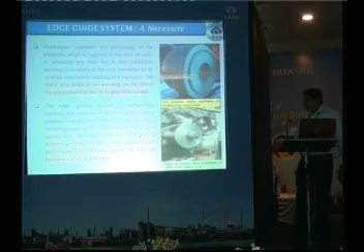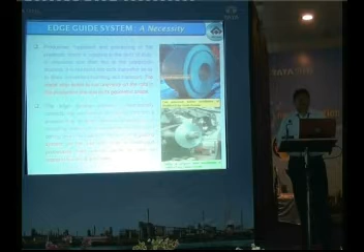If this is the side finish, then your coils will not get damaged. As I mentioned, for production, treatment, and processing of flat products supplied in the form of coils, it is unwound and then rewound for further processing.

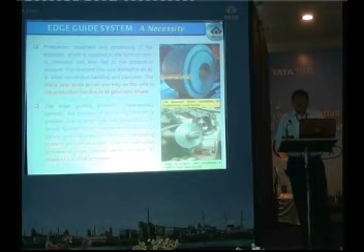For any recoiler to have a proper edge guide system, the main parameters are that the edge guide system should sense and take corrective action or respond quickly. Otherwise, if the response time is more, then your purpose will not be solved.

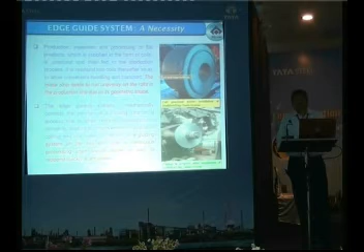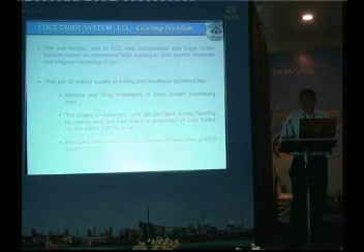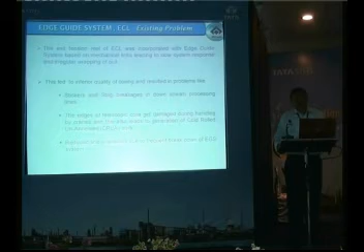Because if there is a lot of telescopicity in the coil, or if your edge guide system is not functioning properly, then you have chances of stickers and strip breakage while you process it in the downstream. Like in this case, if it is being processed through the batch annealing hood or in DCR, then you may face problems of stickers and strip breakages.

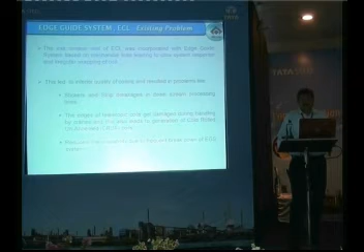The edges of telescopic coils also get damaged while handling by cranes, as I've told you. And since the system was old, there were a lot of breakdowns in the hydraulic tank, the hydraulic power pack, and in the sensors. The sensors were also old.

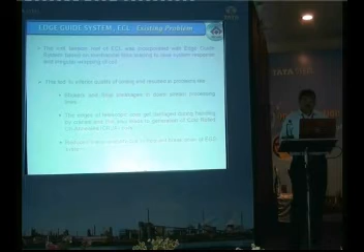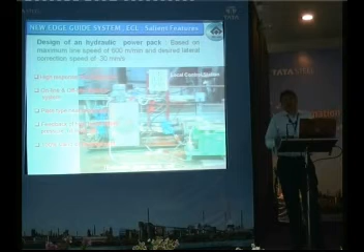So to circumvent these problems - the main problems were, one, the system was old, it was not able to sense properly or act fast. Second, the original hydraulic power pack had valves which were not of the latest model, they were quite old.

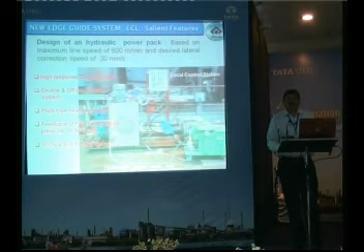Like you have servo valves right now, which are much faster and used for closed loop control. They have high dynamic response, and you can control the pressure, flow and position accurately with the servo valves that are available in the market right now.

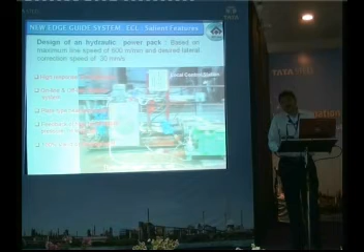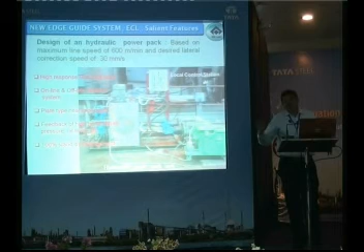So designing a new hydraulic power pack was a challenge for us. Then you had to design a system through which the operator could operate through a remote desk, because of the less manpower. Initially when the mill was installed, there were a lot of people in the shift who could run the power pack separately, who could run the system separately.

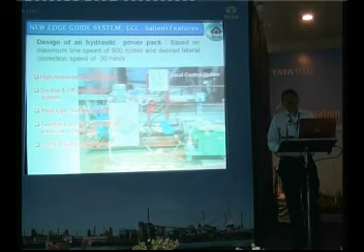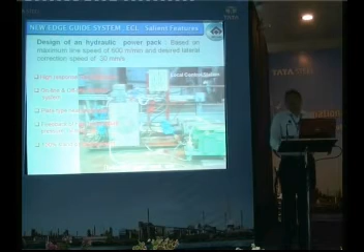But right now, since there are one or two operators, we had to design a system where only one operator could operate the power pack from a remote location, could control the total operation from one location. So automation was a need, but with the support of engineering, through which we designed the hydraulic power pack.

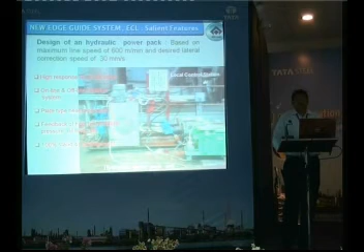So the salient features of the new system that we installed were: first, our aim was to design a hydraulic power pack based on the maximum line speed of 600 meters per minute and a correction speed of 30 millimeters per second.

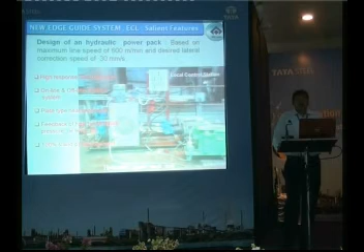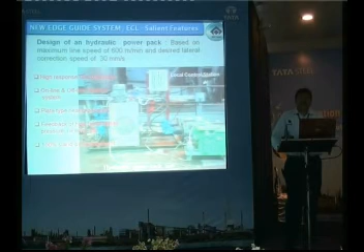For that, the important thing that we put in the system was high response servo jet valves, and an online and offline filtration system, because cleanliness of oil is a very important factor. If you are using a servo valve, you need a NAS value of 5.

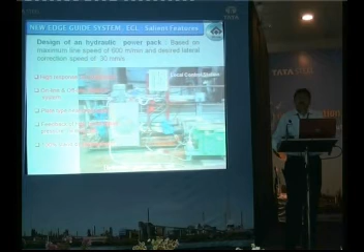Then, if you are using a servo valve, there is a lot of pressure drop across it that heats up the oil. So you need a plate type heat exchanger. We installed a water cooled plate type heat exchanger.

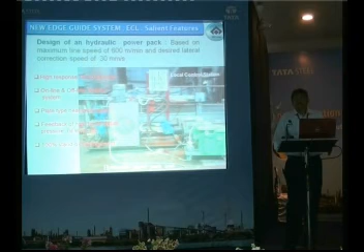Then various feedbacks were required, like clogging of the filters, oil temperature, and pressure in the output line. So all these feedbacks we took it to PLC. And there was 100% standby arrangement for the motors also.

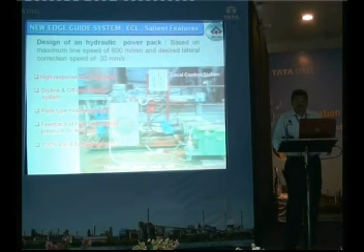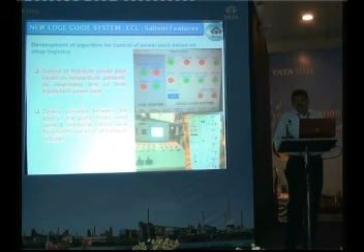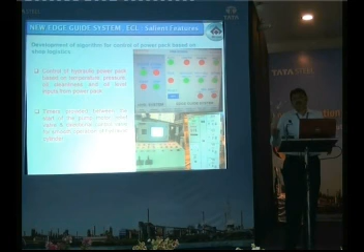This slide shows the use of the automation system which we installed there in the remote panel, from where the operator could know each and every parameter of the hydraulic power pack and of the edge guiding system, like the sensors, the light source, everything, and he could diagnose the faults and tell it to the electrical or mechanical people, whatever be the requirement, whatever be the need, if there is a breakdown.

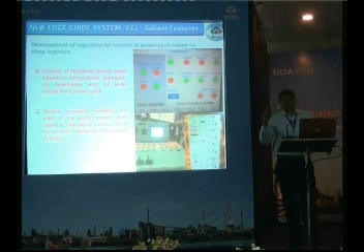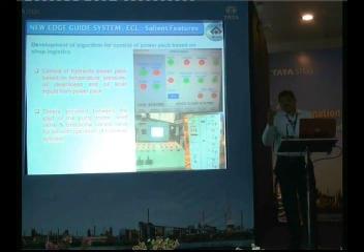Second thing, when the recoilers moved forward and backward in the initial power pack, there were jerks. So to remove those jerks, we designed an algorithm for starting of the pumps, relief valve and directional valves, so that there was a time gap so there are no jerks in between, to make the operation jerkless.